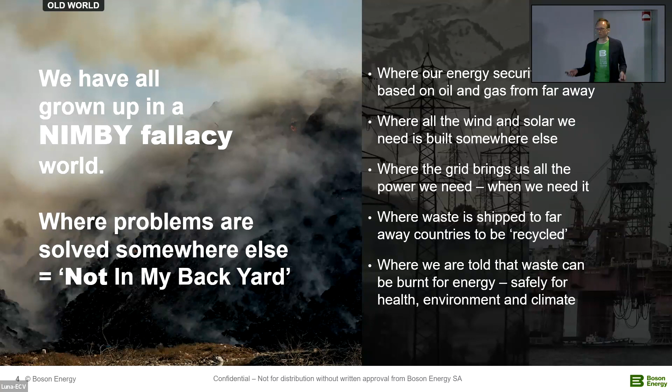Our energy security is based on oil and gas, and all the wind and solar that we need can be built somewhere else, where the grid is there to give us all the power that we need, where waste is shipped far away to be recycled, and we're also told that we can burn waste, and that's perfectly fine for our health, environment and climate.

What we are doing is inviting you to an IMBY world, in my backyard, where we solve waste problems locally and produce energy locally, where recycling rates are close to 100%, where 1 ton of waste can take a bus 1,000 kilometers, and at the same time avoid 3 tons of CO2 emissions.

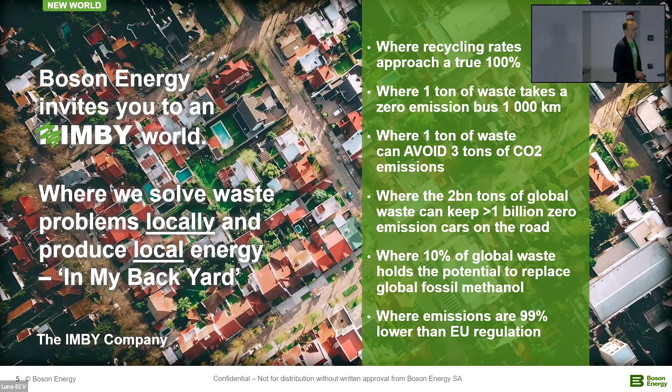Globally, this translates into 1 billion zero-emission cars, if you will. And 10% of global waste is enough to replace all fossil methanol currently produced.

So doing that, we say that we make zero waste possible. We turn it into a local circular resource that reduces infrastructure stress and supports climate mitigation. And we need to do this better, cleaner, and cheaper.

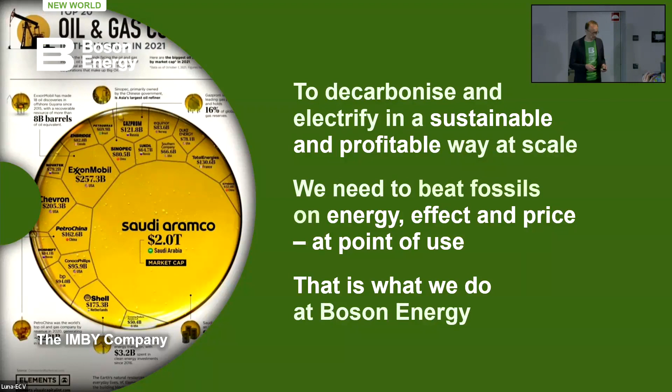Because we cannot kid ourselves. To decarbonize and electrify in a sustainable way at scale, we actually need to beat fossils on commercial terms, on energy, effect, and price at point of use. That's what we have set out to do. How do we do that?

So we use gasification. It's one of these promising technologies that have been around forever, with a lot of incremental innovation that goes into it, to reach the stability, efficiency, environmental performance, and cost necessary to make this a mainstream technology. We talk about this as the Tesla moment.

We have to remember that we had electric cars for 100 years. They never worked, it was never profitable, but a lot of incremental innovation went into that — batteries, drivetrains, a bit of climate panic. And Tesla also realized that building electric cars is not enough. We need to invest in infrastructure as well for the charging, and boom, we have electric cars.

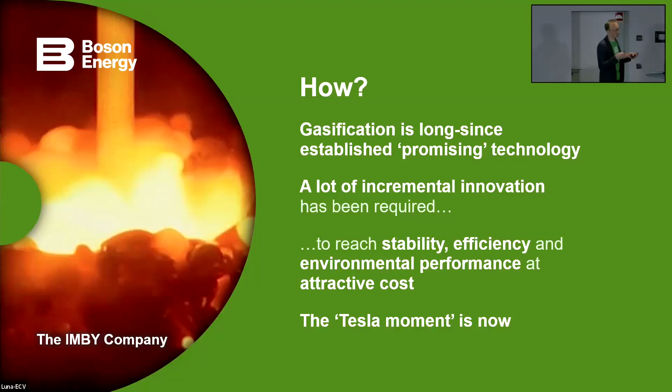So that is where we feel gasification is today. That means a one-step process, no moving parts, zero ash residues, tolerates changing waste. Our standard unit takes 100 tons of waste, which is a size that is good for a distributed solution.

We want to be close. We want to be in my backyard, or the figurative backyard. 100 tons is still not my backyard — it's 50 to 200,000 people, but still it's a community within a reasonable distance.

And that will give me 7 tons of hydrogen. I will capture 100 tons of CO2, 60% of that will be green. I will produce a bit of heat and 10 tons of glass slag, which is what is left.

So all the nasty stuff in the waste is locked in here, oxidized, just like in a drinking glass. The drinking glass is also toxic things that have been vitrified at high temperature, and are harmless. This can be used as a filling material in construction.

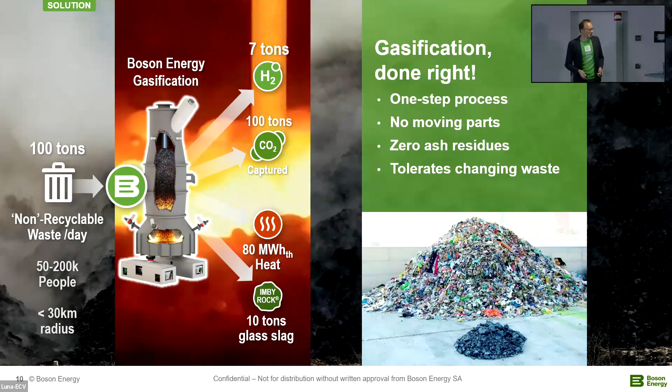But we can't wait around for a hydrogen economy. It will come at some point, maybe, but the vehicles and the infrastructure are not here. The waste is here now, though, and we need to do something now.

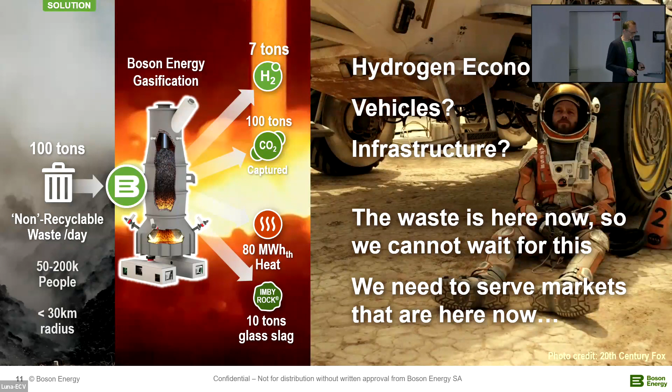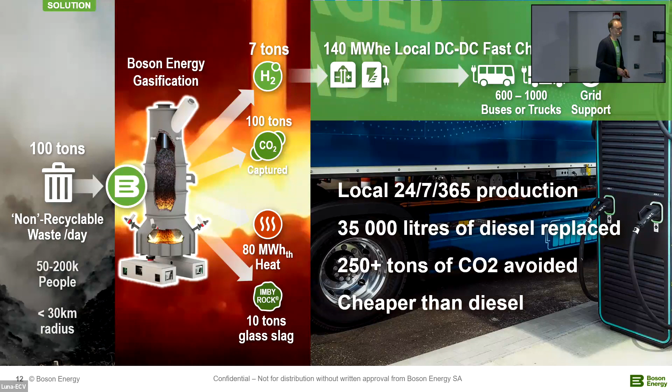So we need to find markets to serve that are here now, and one of those is fast charging. We can deploy this hydrogen as 140 megawatt hours of local DC-DC fast charging behind the meter, which makes us completely independent of any other infrastructure, or deliver grid support. That's 35,000 liters of diesel replaced, 250 tons of CO2 avoided, and cheaper than diesel.

As I have the CO2, if you know a bit of chemistry, if you want to make an e-fuel or methanol, you need not just the hydrogen, but the CO2 as well. And we have that. If you have wind, you don't have the CO2. You need to find it somewhere.

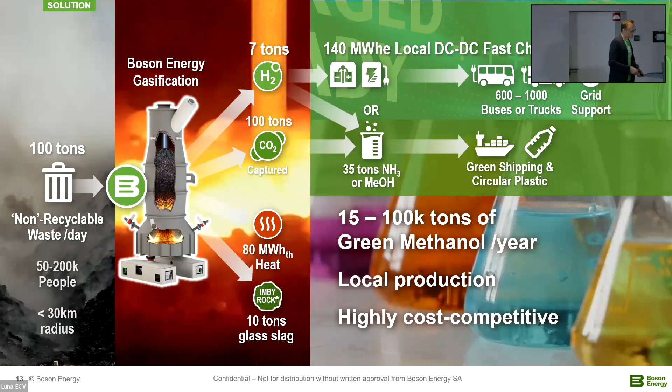Some more CO2 and the heat, if we go full circular now, can be deployed in a vertical farming facility that will basically provide not only energy security, but local food security as well, and independent of energy prices. I mean, you have noticed that food prices are going up. In the Netherlands, they were struggling - well, everyone has been struggling with natural gas prices and things like that.

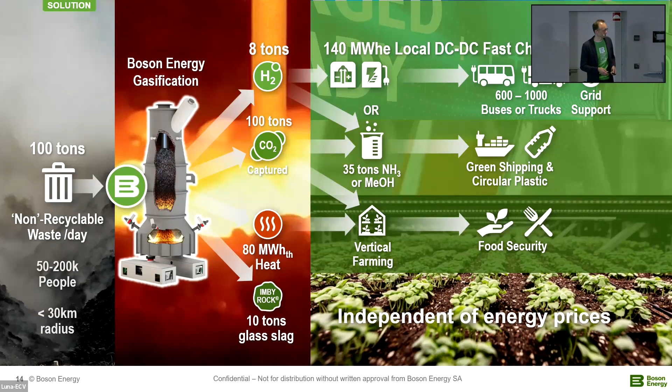And with the slag in a full circular mode, cell glass, which is a high performance construction material that can replace concrete in many applications. This is an insulation material. It's currently made with recycled glass that is melted using natural gas, so it has a carbon issue and an energy cost issue. So there's hardly any of this produced in Europe because of that. And we can make this with waste. So 1 ton of waste is 1 cubic meter of cell glass. You can send this around. It's kind of interesting.

The roof of the European Court of Justice in Luxembourg is insulated with cell glass from recycled glass, but still.

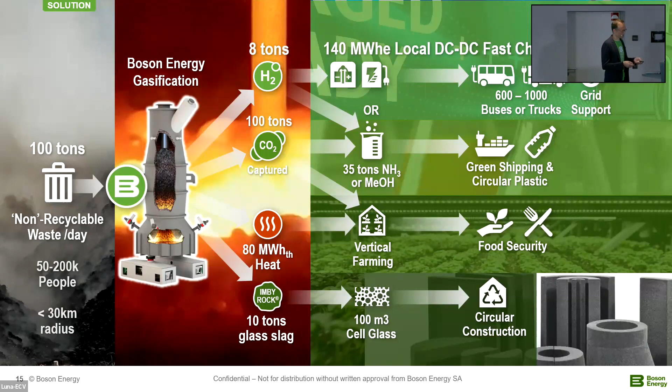So what is this incremental innovation? We brought this technology to TRL 7-8, running on real waste, producing the syngas, the core technology. It has a big and slow bed - if you know gasification a little bit, you know the challenges - for waste quality variations. It integrates pyrolysis, gasification, plasma-driven heat production and vitrification, with low capex and opex.

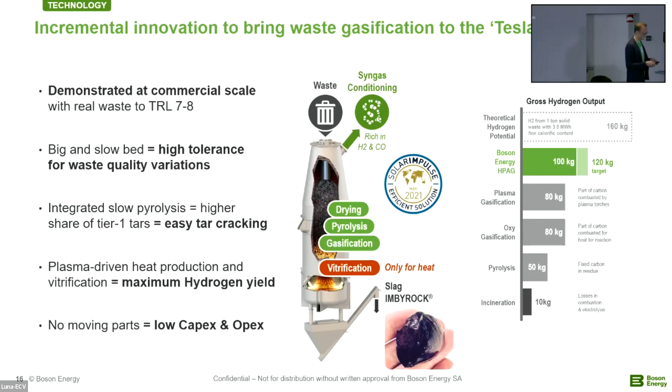And you can see on the right here, you have the yield. We have chosen to go with electricity to do the vitrification and the heat provision. As a result of that, we're not sacrificing carbon content in the waste to produce the heat needed for the process. So that gives us a parasitic load, but it gives us a high hydrogen yield. So we can either produce that electricity ourselves from the hydrogen, or we can take it from the grid if it is available - when the grid is happy with someone taking power from them - and we can store it and then use it in our process. So in that way, we can support infrastructure doubly.

We have brought this from science to fully integrated systems, together with some of the best companies in the world - all downstream systems here. Our reactor produces the syngas, then you do a steam reforming and a water gas shift, and ultimately a PSA will separate the gases. And all these are TRL9 existing technologies.

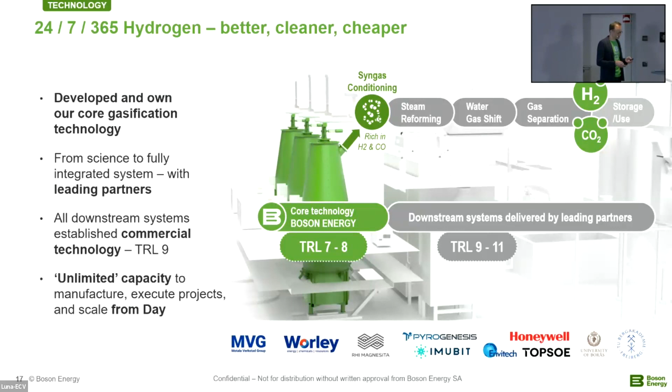And here we work with partners to put that in place, and that basically gives us unlimited capacity to scale from day one. We're also not manufacturing our reactor ourselves.

What is one of the main characteristics of waste then? It's the fact that, as I said yesterday, it's the most democratic and fair source of energy around. Not everyone has wind, sun, water for hydro, oil and gas, but waste - everyone has waste. And these are the incineration plants I plotted here along this hydrogen valley. This is the same, regardless of whichever hydrogen valley you're looking at in Europe. You have waste in large amounts available.

So what that means is that we can deploy these standard units in and around cities to produce this 140 megawatt hour and then distribute it to spokes around the city. It could be 20 megawatt hours. And if you run a bus company, you will know that that is a major amount of energy that is deployed without grid.

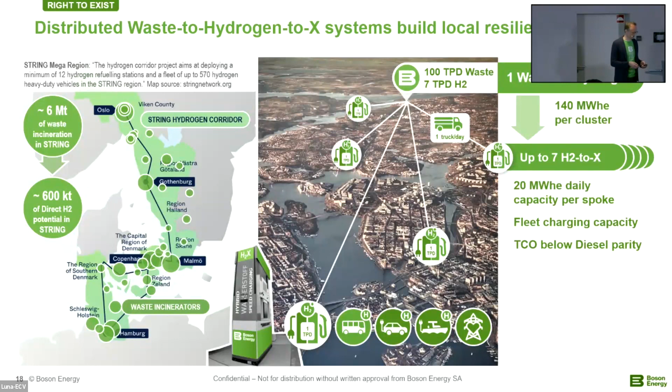So what about incineration then? No, it's not an answer. We talk about incineration as the fax machine of waste management. It was great when it came, it had a lot of benefits, but I don't have a fax on my desk today. I don't know if any of you have a fax on your desk. It has poor energy efficiency. It's not hydrogen capable. It's a forced base load, and it emits CO2.

You can put carbon capture in theory, but in Oslo, they just shut down the project they were doing there. And if Norway is shutting down a project because it's too expensive, then you know that it's not going to work anywhere else.

Ash residues, water footprint - we actually produce water. If we're running this on parasitic load, running parasitic on our own fuel cell, we will produce net water, which is unique in a hydrogen context. Electrolysis needs water, which is a big issue in India and other places as well.

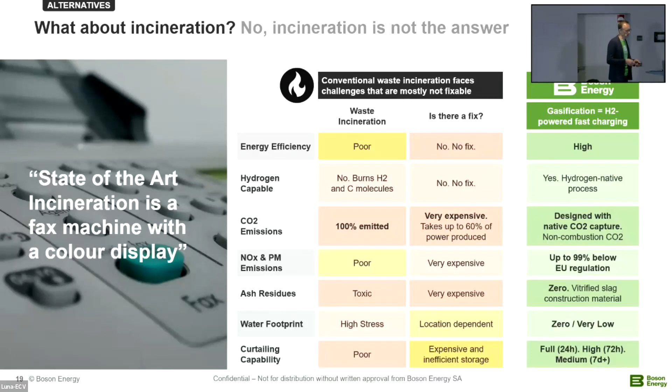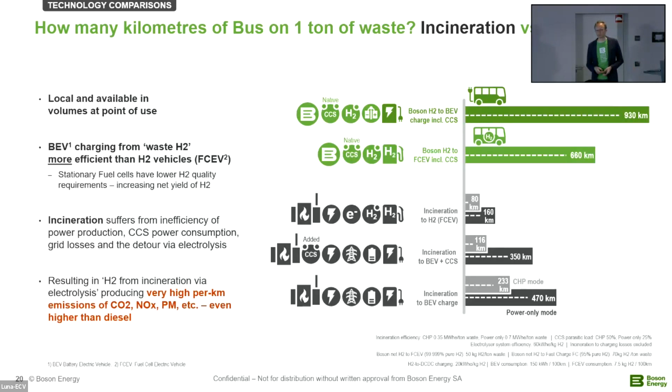The interesting thing here is that if we go BEV, with speed charging instead, a stationary fuel cell can accept a lower quality of hydrogen, which has benefits for our system. We don't have to do as many passes, so we have a higher yield of hydrogen, which means the BEV bus can actually drive further than the fuel cell bus.

So is there a business model here? Yes. And we firmly believe that only profitable business is sustainable business. So there needs to be a business model. What we have here is a situation with multiple revenue sources.

We have a gate fee. We have the slag, or the cell glass. We have the CO2 ETS, if that comes around in a serious way. We also have CO2 sales.

Tim here yesterday talked about CO2 as well. There's actually a scarcity of CO2 for industrial applications - for slaughterhouses, for cooling, for food and beverages. So ironically, we're fighting CO2 tooth and nail, and at the same time, there is a lack of CO2.

And then we have the charging, or we can sell hydrogen, etc. So that actually makes it possible for us to multiply profits in the value chain up to 20 times compared to incineration.

So there is a business. And what happens here, and why this is democratic and fair, is that incineration doesn't work in developing countries. If you make 15 to 20 euros per ton of waste in profit, and you take away 80 euros worth of gate fee, the business case is gone. If we make 150 to 200 euros of profit per ton of waste in the value chain, you can take the gate fee away. It's not going to be as profitable, but it works.

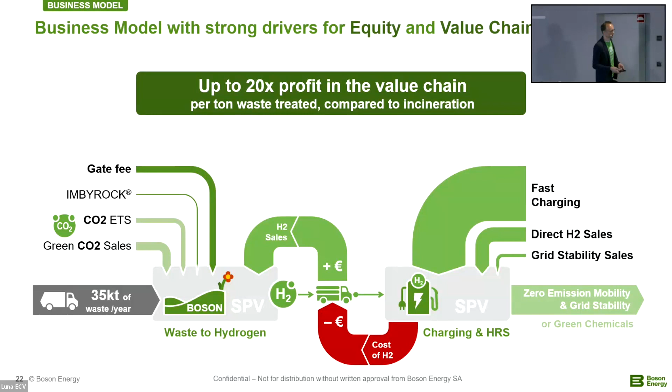And green hydrogen, looking at a cost comparison - green hydrogen today you're looking at 2.50 to 6 euros per kilo. That will go down, but you will always need to add the cost of getting this hydrogen to the local point of use, be that from the North Sea, Morocco, or Australia, and that puts stress on the price at point of use. That is the price that is interesting, because it determines the total cost of operation or ownership. We are at 2 euros today, but we are close - we're already around that at the local point of use.

Now, with these additional revenues, if we can do our business development well, we can get down to a zero cost of hydrogen. It's not going to be sold for zero, but it has an effect - it affects the business model.

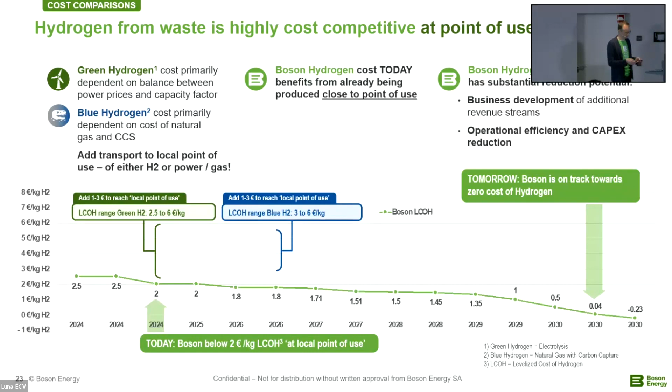So we have 2 billion tons of waste globally. That is 200 million tons of hydrogen potential. Global wind in 2021 had 31 million tons of hydrogen potential. And looking at the pace we are building wind out, there will be fierce competition for that energy. In Europe, the offshore wind built out every year can supply 10% of the BEV additions in a year. So every year, the offshore wind we build will power one out of every ten new BEVs coming out.

And we're only at the start of BEV build out, and there's not a shadow of the infrastructure necessary to get this power there as well. If I take 10% as mentioned, global green methanol, another 10% global decarbonized urea, I would need 120% of global wind to do this. So we have the potential here.

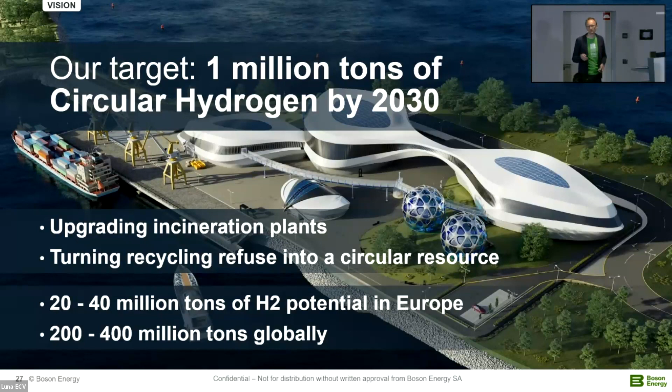But there are also a lot of pragmatic businesses. I mean, we have a problem to solve here, and waste is one of the things that can solve this. And we're looking at major volume potentials. We have a project pipeline.

One of the interesting projects we're developing right now is a port in Sweden, which will probably be the first carbon negative port in the world. We will produce hydrogen that will be used for hydrogen powered speed charging, port electrification.

One of the problems they have is that more and more vehicles are electric. You cannot ship charged battery electric vehicles, so they come to port empty. And he calls up the local DSO, the power company, and says, hey guys, I need another 20-25 gigawatt hours of power every year. And the DSO said, that's so funny.

I don't have it, so you're on your own, basically. So what we're doing is we're bringing waste in, we're producing that power. The rest of the hydrogen we will produce methanol with, and the CO2, produce methanol. We will store away the fossil CO2. We will deliver heat to a local greenhouse and eventually produce cell glass.

Very nice setup. We're also talking to, I think, 5 incinerators in Sweden that are very interested in a technology shift. They are understanding now. They sat down with Excel and they looked at carbon capture and they realized this is not going to happen. We actually need to make the shift.

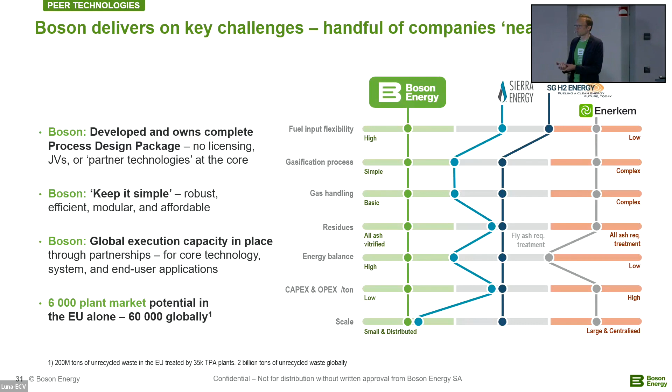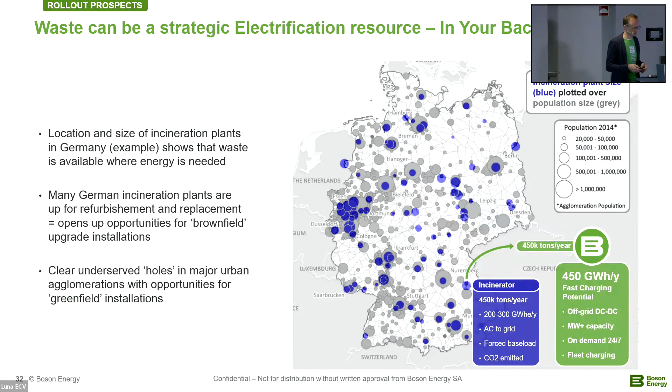This is our vision to build 1,000 fast chargers in Europe. The waste is there. It will create a major infrastructure relief and possibility to do these things, to roll out commercial vehicles, heavy duty vehicles.

Because today, in the contracts, in the tenders that the municipalities issue for buying electric buses, for instance, talking to the OEMs, they tell us that there's always a clause in the tender that says that if the municipality is not able in the end to come up with the charging for these buses, they will have to commit to deliver diesel buses instead.

So you can ask yourself how this EV rollout is actually going. These tenders, these contracts are signed, and I guess these buses are made to be delivered in 2-3 years, so I guess the verdict is out on how many of these vehicles will actually be electric.

Because in general, in grids today, the grid that you have coming into a bus depot is typically okay to electrify 2 or 3 buses. But if there's 200 buses in the depot, what do you do?

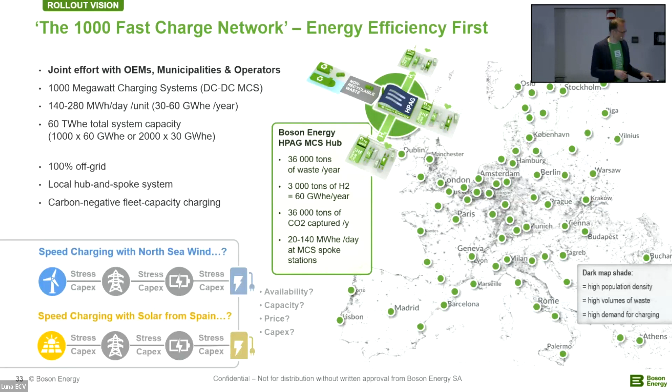Thank you, Heike. Any other questions? One more here. It's so nice to have time. I've been on these 4-minute pitches, 3-minute pitches, and it's just nice to be able to have a conversation with you guys. There was someone here.

So, Anna Krüger from Heuer Group, a logistics company. I'm interested in, by the way, I can confirm the availability of charging infrastructure for trucks is really a problem in Germany. By the way, one statement on mobility: currently, transport of hydrogen is not possible with hydrogen fuel vehicles, as we are still waiting for the ADR homologation in Europe, but that's just on the side.

You made a statement that this is cheaper than diesel. Can you elaborate on that statement? What is behind it?

Yeah, I mean, it's math. If I produce at diesel parity today - if you're at €1.50 per liter, you're at 8 euros per kilo of hydrogen. If you translate the distances etc., at €2 you're at 10. We produce hydrogen at €2, we sell it to the HRS at, let's say, 5. I mean, there's still a lot of room there. And you can translate this into electricity prices as well.